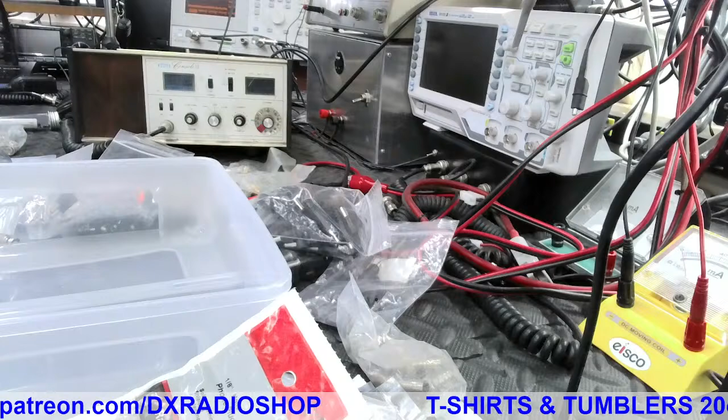So we had to help him over the phone with that. Then he got upset. He says, well, shouldn't you have told me that to begin with? I said, well, shouldn't you have already known how to start a truck and know how to drive it before you start the truck? He said, what do you mean? I said, well, it's not my job to remind everybody about your SWR. That's your job to know that you don't just put a CB in a vehicle and expect it to work. You guys got to pull your weight too, so I had to explain to him all about SWR.

And after explaining this to him, he says, no, I understand. We even did a demo with this 29, so he understood completely 100%. And he did it himself, hands-on. And he said, okay, nope, I got it. So, okay, cool, get them all squared away.

He's set to go, only to find out two weeks later, he gets in a different truck. Don't you think the same thing happened again? I said, did you check your SWR? No. You know how to do it, right? Yep. Well, then that's why your radio's all fried up again. He says, yeah, but does it matter what vehicle you get into? I said, well, yeah, it matters what vehicle you get into.

I thought you just matched the radio to the antenna. I said, no, you match the antenna to the vehicle, to the ground source, to the plane. You don't take and mount that or match it to your radio. Your antenna doesn't know what radio you have, it's not aware of it being a Cobra, Galaxy, Export, whatever, it doesn't know any of that. So yes, it is important to maintain a good SWR, guys. If you don't, well, then I don't know what to tell you, other than it is what it is if you fry your stuff.

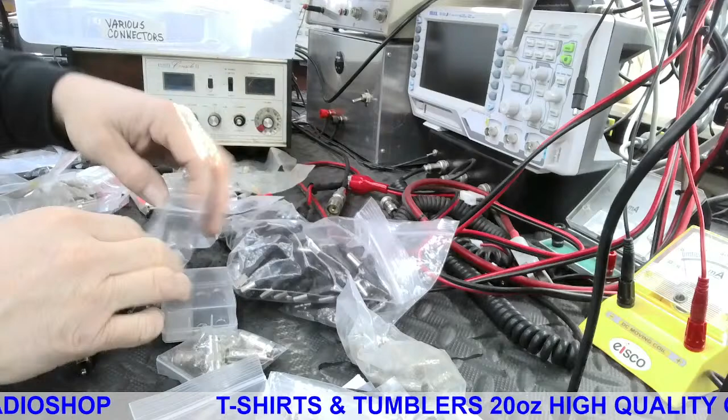Oh, let's see. I got a bunch more of those, don't I? Thought I had another bag full. Yeah, right here. Thought we did.

Transfer these ones over as well. That gives me an extra baggie to work with. Keep them all in one spot.

I gotta build a dipole antenna for a friend.

Oh, there's another bag right here. Jeez.

Yeah, my connector drawer here got a little cluttered, so we decided to organize it this morning before we get involved with all kinds of major repairs today.

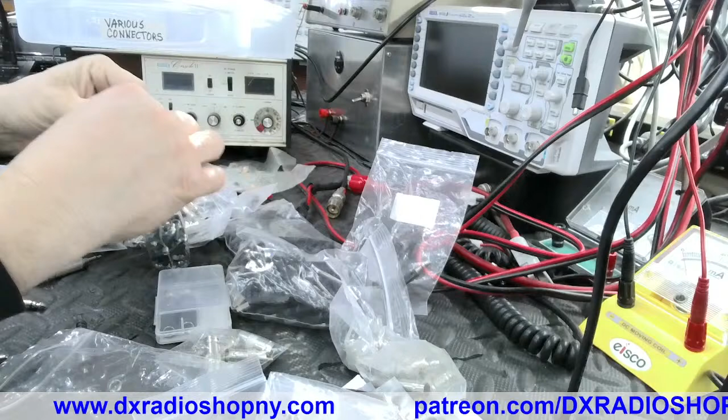But yeah, I got to build a dipole for a guy, and I'm going to show you guys an easy way of doing this, what we call an easy transport connect-disconnect system.

You guys do the same thing, yeah. I'm going to need you here, I suppose, then. Jeez.

So stay tuned for the dipole video, as that will be coming up here real soon. Probably going to be doing it at some point in time this afternoon. Or maybe this morning. I don't know. We'll see.

I got to get onto these radios here. I got a lot of radios that need to be done. So, but I got to take and get some smaller projects out of the way as well.

Okay, I'm going to use the last one. Got one left here.

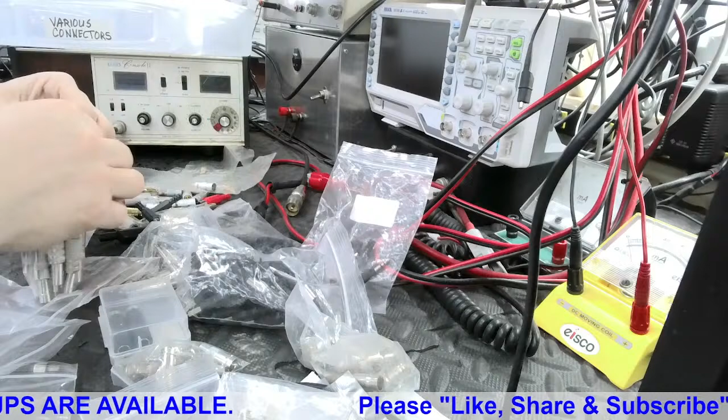Yeah, it makes no sense with a J-pole because it actually showed up as a dead short, and you would think, well, if I transmit, I'm going to fry my radio. So yeah, give me a second here to move things out of the way. Just give me a moment here, and I'll draw this out for you. It's easier that way for me than how I explain it, other than to show you or just tell you my words. So give me a second here.

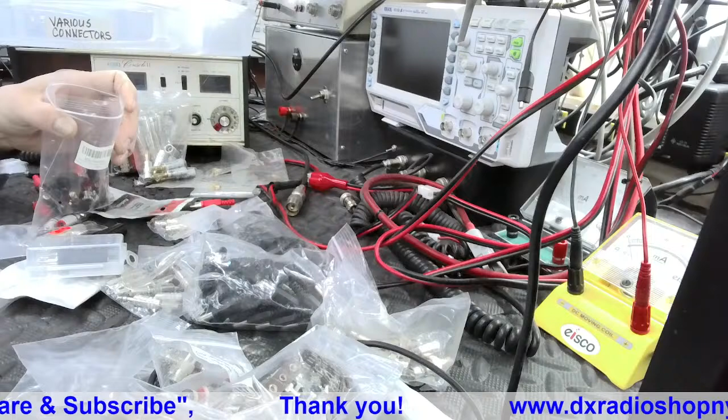Very strange indeed. Let's see, I'll leave you guys here with this. That's a brand new one.

I guess. Put stuff in order. So much easier to have them all bagged up than it is to just loose.

Then I can take an inventory as to what I actually have when I want to build something. So I'm going to be using some of these connectors when I do the dipole today. I haven't decided which yet. I'm thinking the banana connectors, but I gotta see which way I want to go with that.

Thought I had a bigger baggie here.

Okay, so with the J-pole, it's very different. All right, so here's your J-pole.

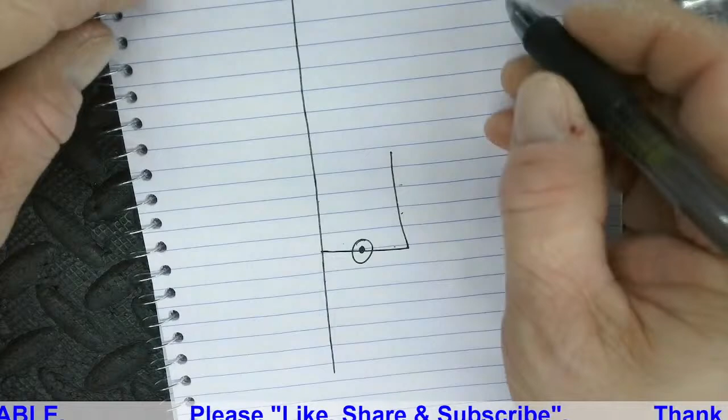Now, if you did a continuity check from point A to point B, you're going to find out that every piece of this J-pole touches. It's all continuity. So you would think, well, that's a dead short, which, yes. However, the capacitance tuning here is what changes all the magic. So what happens is when you do this, we're going to go this way, and we're going to leave a space.

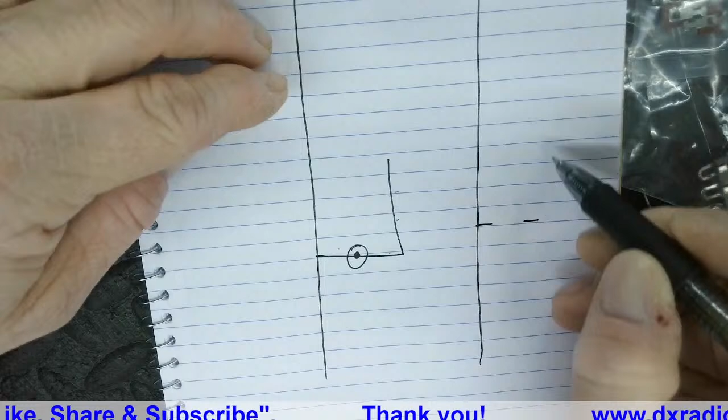And what that space is for is a non-conductive piece of plexiglass that bolts down. Now I did it this way because typically what you'd do is actually take and mount that plastic right here to the half-inch copper, and then your tubing as well.

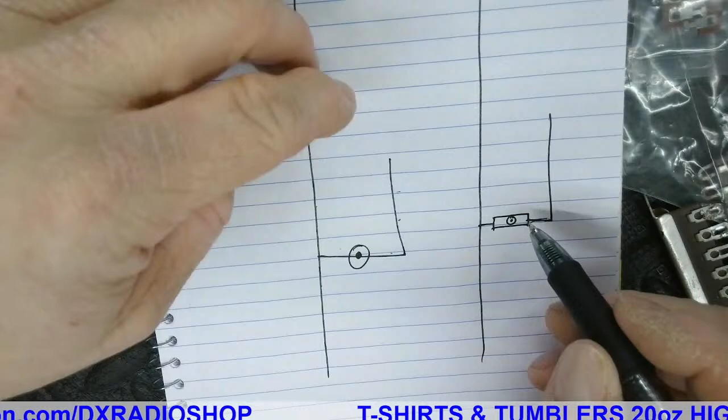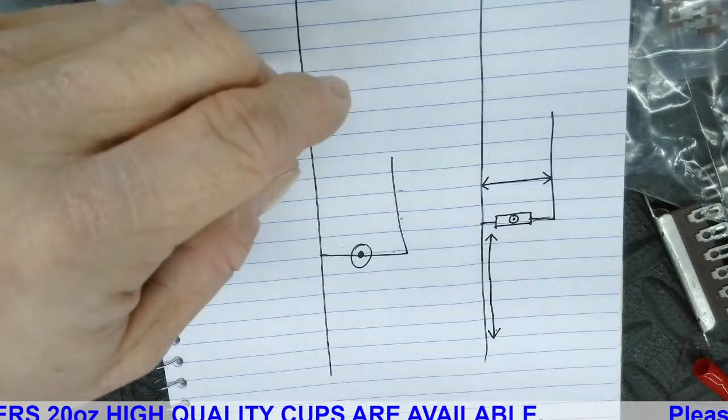So what you're looking for is the tuning here. Now this becomes very important because this has to be spaced just so right, and then this here has to be a height of just so much, and that gives you your tuning of the bandwidth along with the lengths of your tubing. So let's say, for example, let's go with 60 inches tall.

Well, let's see, 19 minus the difference. Yeah, it'd be roughly about like this. It might even be like maybe 20, might be about like 20 3/4. Actually, I think it is.

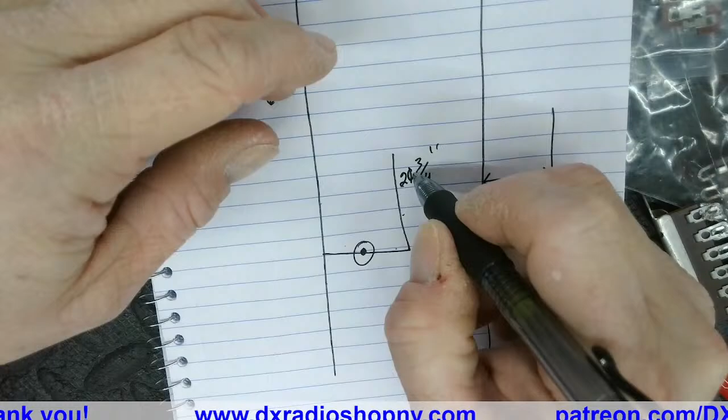So what you need typically to do a VHF UHF antenna, you would only need something that's going to be 19 1/4 inches to get you your VHF band.

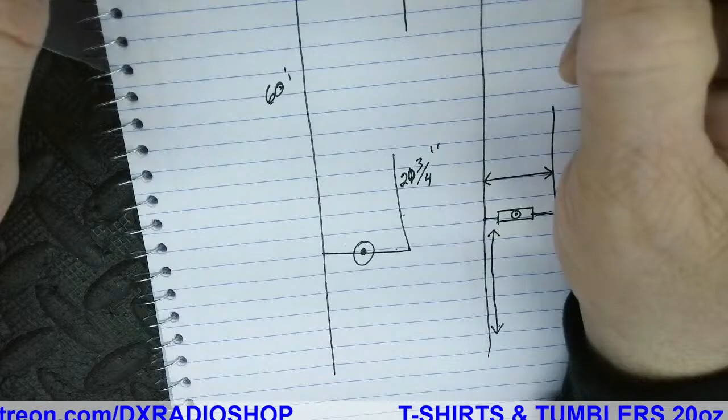Okay, however, this measurement here is more than this because you're going to end up having like a little nub sticking down, like so. That's your half-inch copper. So what you're going to end up having is 19 1/4 inches roughly from here to here.

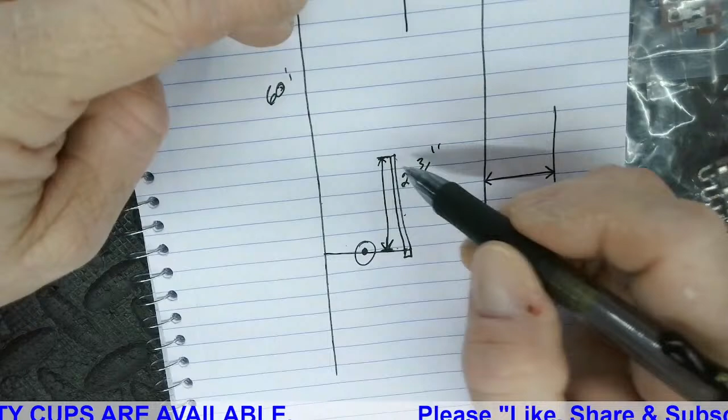Okay, so this little bit is okay because what's going to happen is it's going to actually tee off to this point, as such.

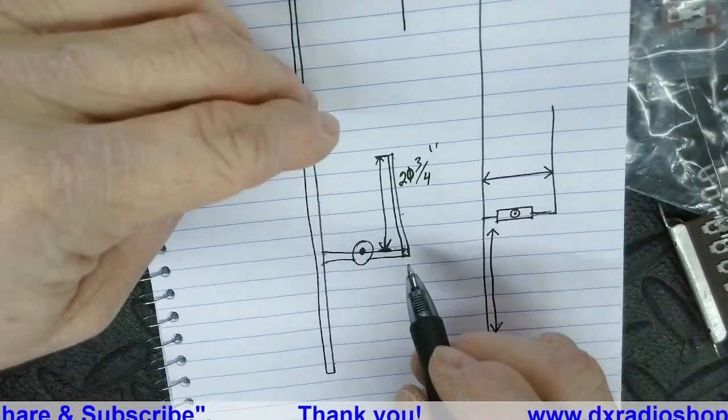Now, we have our measurement there, but we also have to get our measurement here. And they've got formulas, I forget what they were now. What was it, 7? I don't remember off the top of my head, it's 700 something or 468 divided by frequency, or I forget what it was now.

I'd have to look it up. I don't remember off the top of my head. I used to do these all the time, I used to memorize this stuff. I don't do this much anymore. But anyway, so whatever your formula is would come out to be what the measurements would be.

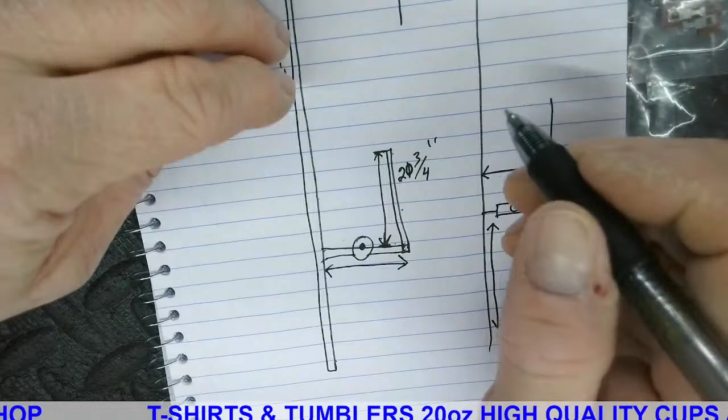And this right here would be the distance from that. So typically, let's say you have a platform. You want to bring this piece here down, we'll say, well, at least 3.5 inches. That's right, or is it 3 inches?

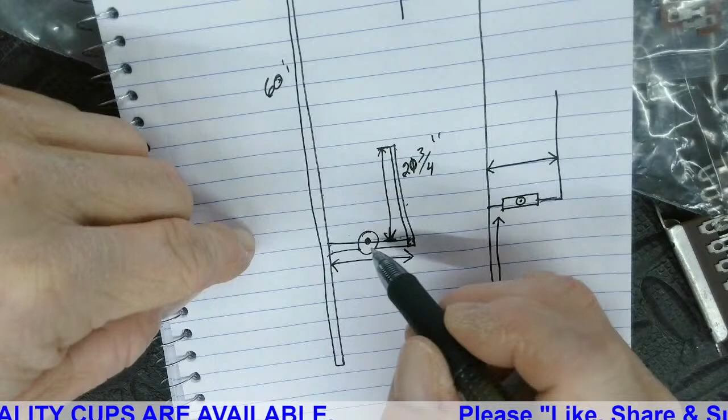That's 3, because you're 3.5, right? Or is that 3.5 up? 3. I'm trying to think which way it went now. It's either 3 inches here, and then this part would be 3.5 inches. Yeah, that's what it was. So 3.5 inches up and down, that's your space in between.

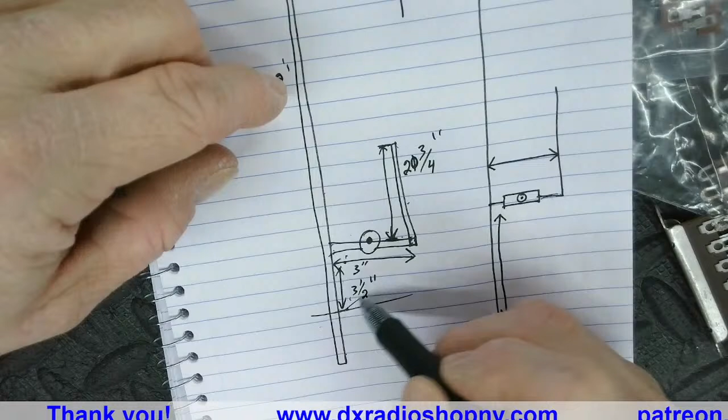Down here means nothing. So then this would be your base platform, and then you've got your 3 inches going across. And so if you get those measurements where they need to be, and you adjust this where it needs to go, so what you're doing is adjusting this up and down on your 60 inch, rather, your 5 foot. You're going to find the right area for that bandwidth, but then you've also got to have the spacing here correct as well.

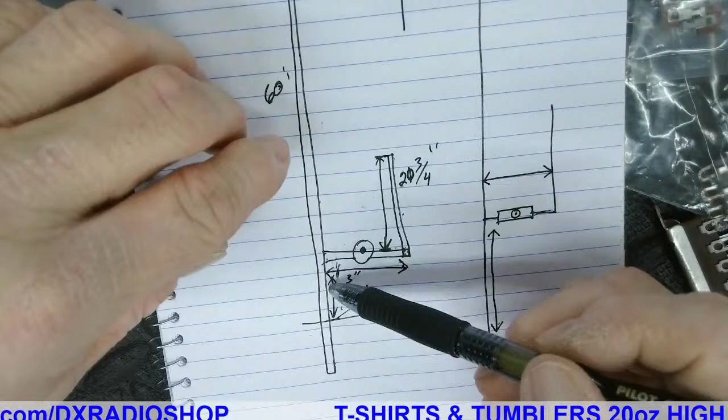So you're looking to get this where it needs to be from the stub up to this point. So, for example, let me get my print up, because I've actually got... I did that with the lamp, and it came out great.

Let me do this, I'm going to print this up right quickly. Just much easier, I can show you guys more other than my scratchy drawing.

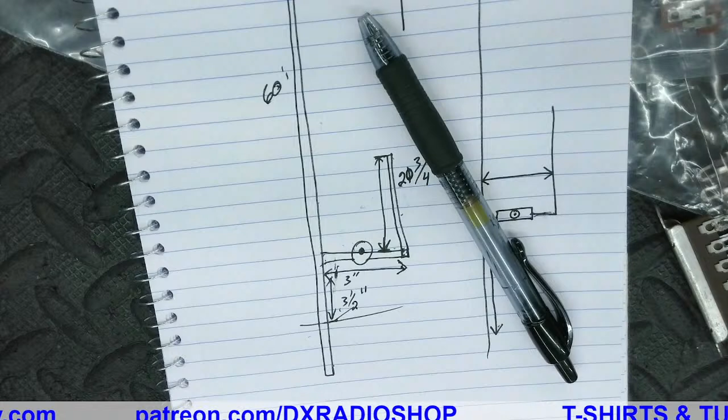I'll give that a second to print up, and then I'll show you. I'll show you what I mean here in a moment. Just wait for it to print up. Get this out of the way.

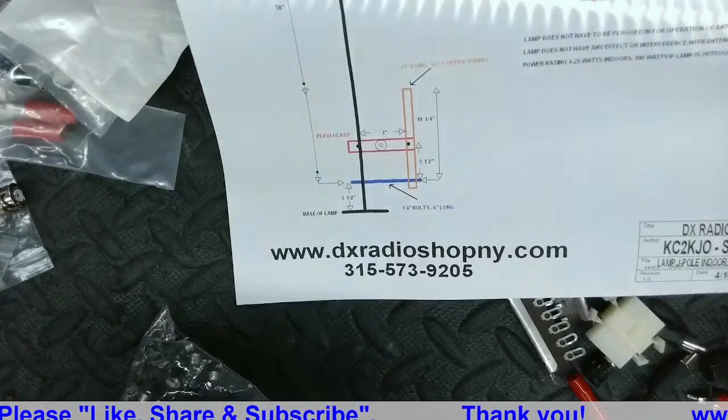All right, pay attention, Brandon. This is your question.

Okay. Trying to sort the parts out here. Making a mess.

Okay, this is something I designed and engineered myself. And it came out to be a great hit, as many of you all already know.

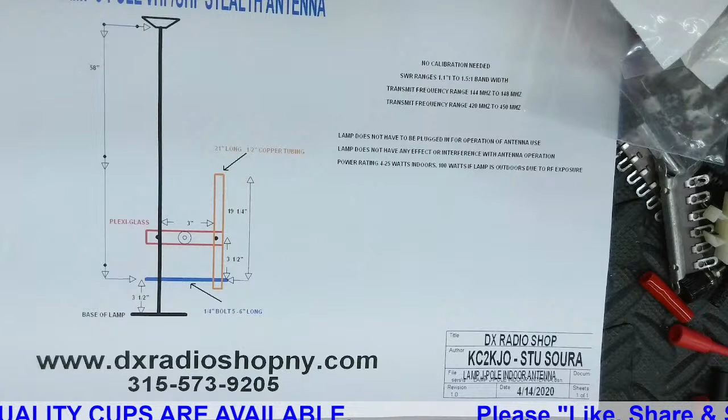Okay, will that work? Yes. As far as the SWR goes, I would be in question of it. It looks like your measurements are off on this. Looks like it's too close to the bottom and not enough spacing. So I would say your SWR on that was probably going to be high.

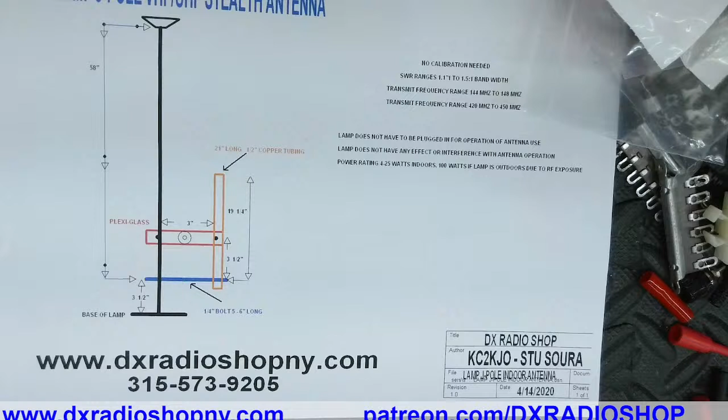If you were to check your SWR, that would probably be high. You're on the right step, it's just you've got to space it and measure a little bit better. But otherwise, you're pretty close with that, so you're doing a good job. You just got to kind of tweak it a little bit here.

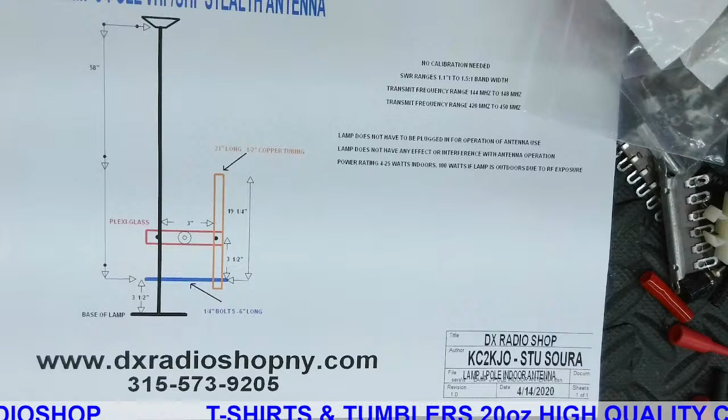Let's go back to the illustration of the print here, so you can see what I'm talking about here. Okay, so this right here is what you'd come up with.

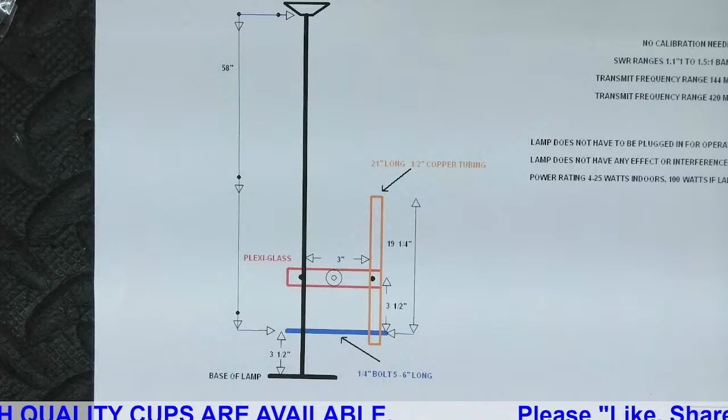So this is a lamp. They're generally about 5 foot tall, okay?

So, 58 inches from the lower part of where the shade is to the base. I'm sorry, to this - 58 inches from the highest point down would be to your low point of the J-pole, okay?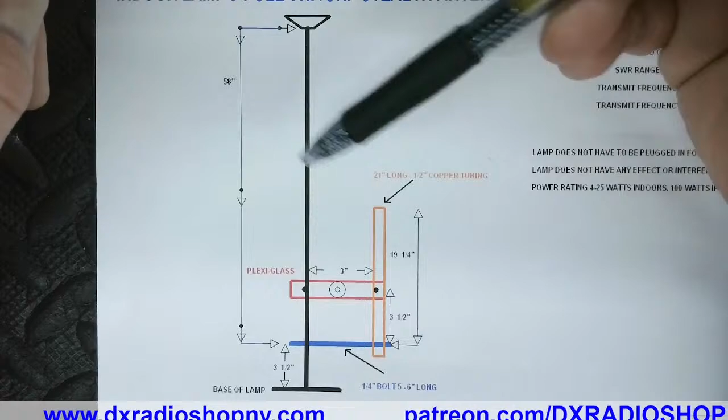So what I came up with, took me a little while, about 4 or 5 prototypes to perfect this with no calibration needed. So these are all preset for everything. And so what this does is you've got your 58 inches here.

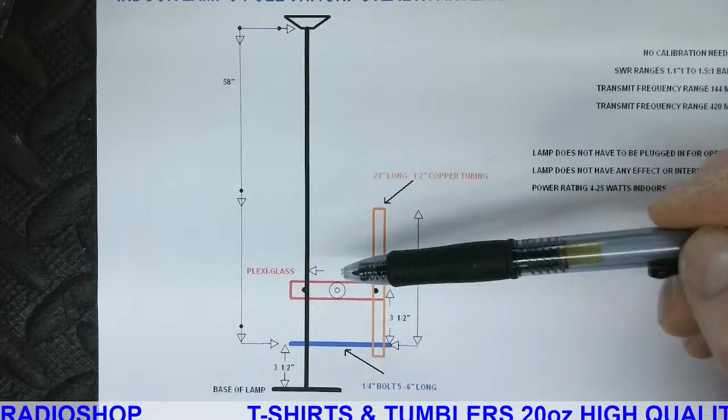You've got 3.5 inches spacing from the platform to where my low point is going to be. And then at that point, we've got our 3.5 inches spacing from the top side of this bolt. It's a 1/4 inch bolt. You can use up to 5/16, but I wouldn't go past that.

So 1/4 inch bolt, and then you go up 3.5 inches to center. So there's your 3.5 to center. This is your plexiglass. The shield goes to one side, and your center connector goes to the other side.

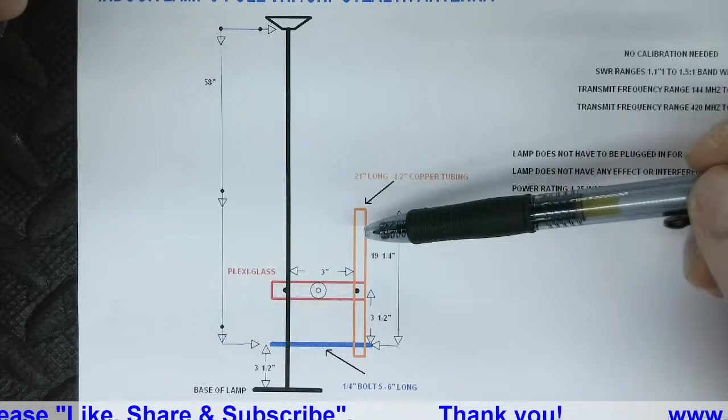Then you've got 3-inch spacing between the outside of this body of the lamp to the inside of this here body of the 1/2 inch copper tubing. And this would give you 19.25 inches from here to here.

So we're going to make that actually a total of 21 inches long. I put 2 3/4, but yeah, 21 inches. I knew it had to be somewhere close to that because you're going to have a little stub hanging off, but that's okay. So this will give you the proper tuning.

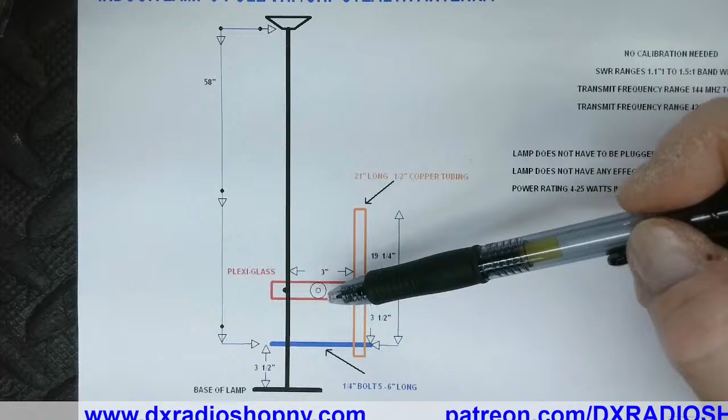So where you raise this part up and down, and the spacing in between, is what gives you your capacitance change of the SWR. So that's where it becomes critical.

But if you still do a continuity check, it's all going to show touching, which is what it is, because you're down here with a solid connection. This is not fully isolated because you've got that connected for your low point.

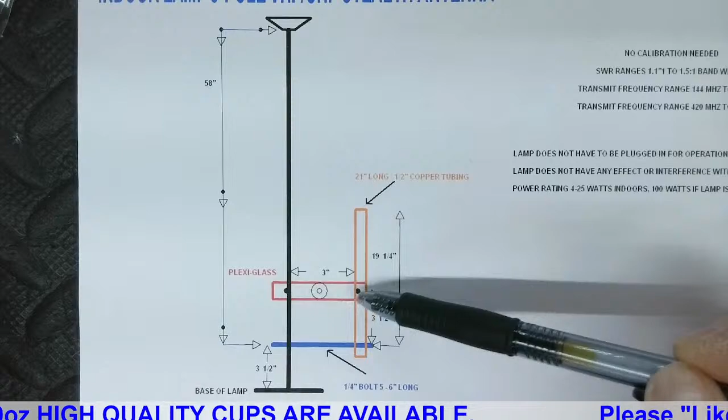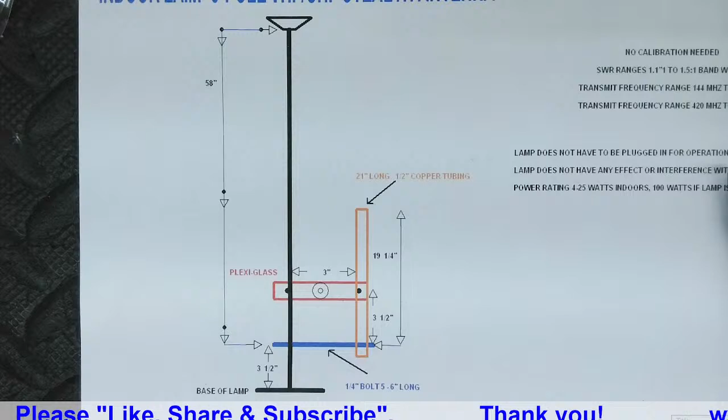So, but yeah, this is what you're looking for right here. This is the measurement. So you want to be 58 inches from point A to point B. At that section, you're going to come across...

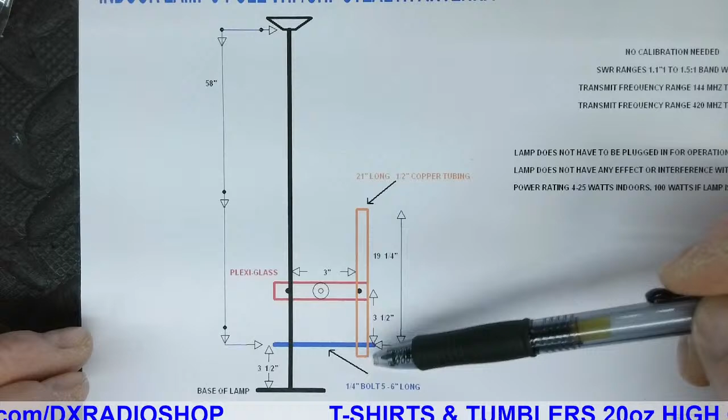I am using a 6-inch long bolt, double nut on both sides, double nut on both sides. It's a quarter inch bolt, 1/4-20 thread. So what you're going to do at that point is when you come down 58 inches from the base point, 3.5 up, 3-inch spacing.

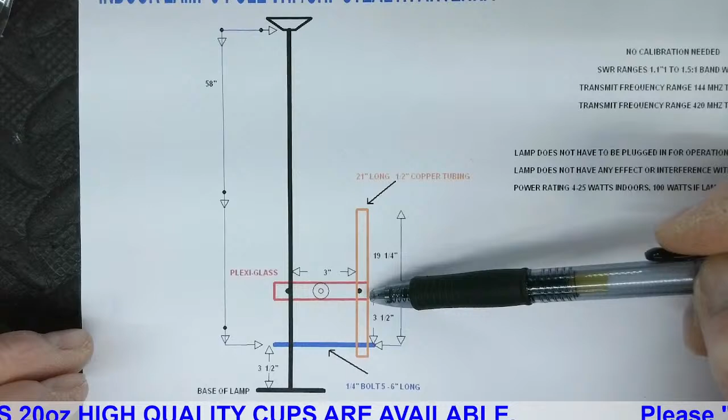3.5 up from this point, the top of the bolt to the center of your - sorry, I said that wrong - from the center of the bolt to the center of the plexiglass. Should be center to center, would be 3.5 inches. And that would give you a pre-calibrated antenna J-pole system.

Now if you want to change this for a CB band, you could do that. You've got to have a longer bolt here, or I mean a longer pipe, which should be about like another foot, I think it is. And then I forget how long this is going to be, but this becomes a little bit longer as well. And then of course your spacing up and down, side to side, and here changes as well.

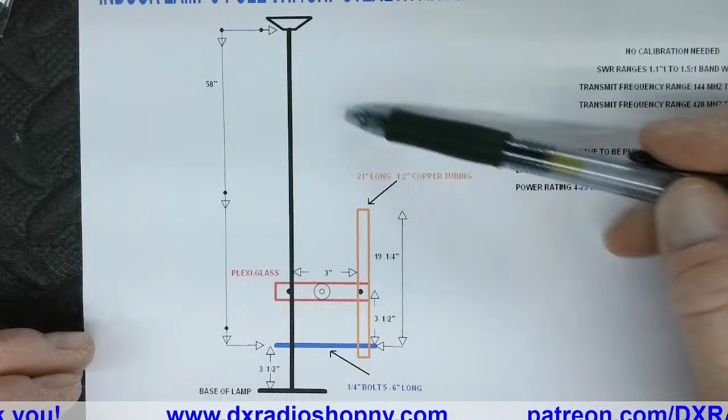So calculations for this is for a VHF UHF. If you want to go for 11 meters, then these are going to be a lot larger. And if you want to do much bigger yet, like a tower, if you want to take a tower and put that to a J-pole and still use the tower for its main purpose with an antenna on top, you could do that. But again, it's going to be different.

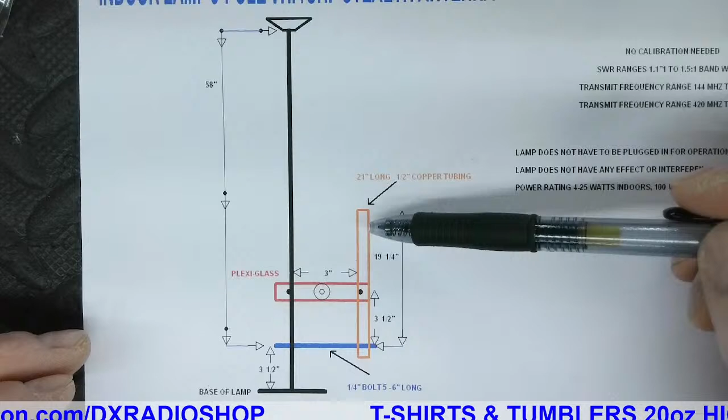We were going to take a friend's tower and turn that into a 20-meter J-pole, but we would have come out like, I think it said 8 or 10 feet this direction, and then come up like another, whatever it's going to be, 7 or 8, 10 feet. So you would have had to anchor that down with a non-conductive strap of some sort to hold this pipe from swaying back and forth.

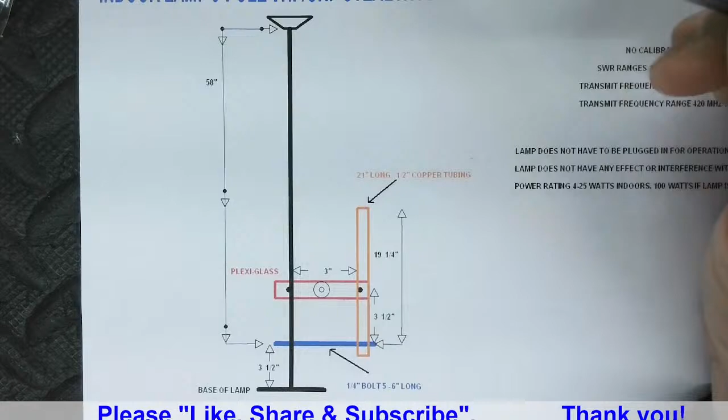So we were going to do that. We never had the chance to get it done, but you could take a tower and convert that into a J-pole, use the tower as an antenna along with whatever antenna you got up on top would be isolated by itself as the antenna and what you wanted to run for that bandwidth.

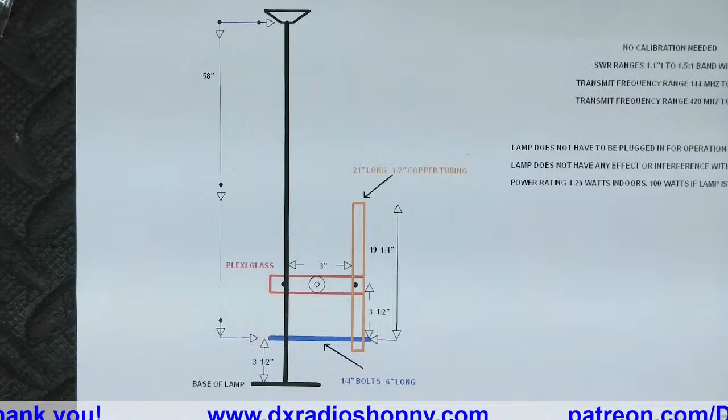Yes, you can do it either way. You could put the conductive side over here and the shield on that side, but typically this would be your shield, and that would be your conductive side. But I've seen people do it either way, and it still comes out the same. Slightly different on the tuning a little bit, but yeah, I use the shield here, and I use the center conductor over on the shorter element.

No, you don't have any RF loss. No.

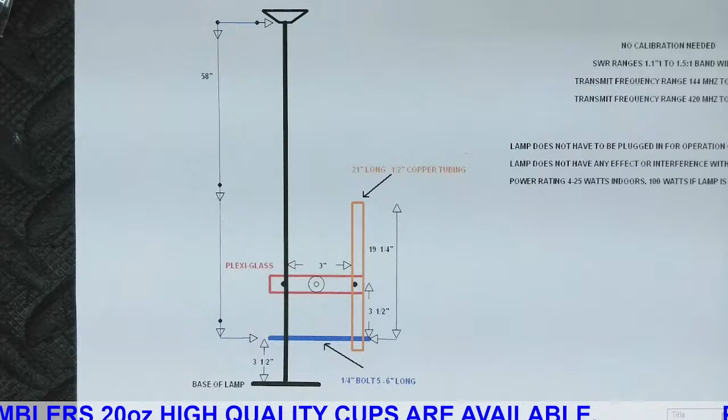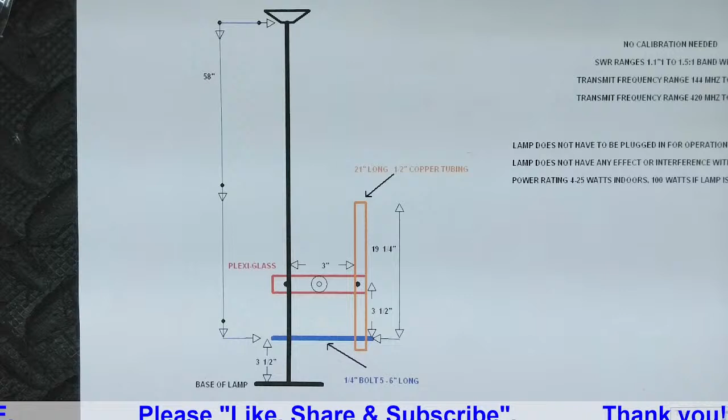And what's nice about this design, it took me a while. I sat down one day and wanted to check it out, playing around with some measurements. And I made 327 of these lamps. My mom, my son, and I made 327 of these things and sold them for $48 a piece. So we had quite the year. That was back 2019 when we built all these things. So it's 6 years ago, come spring, since we did these, and we don't make them anymore because I just let everybody take the measurements and do what they want with it.

Because we don't have room to store these things. So, but it's really easy to do. You don't have to buy a lamp. You can just build it yourself out of copper piping if you wish.

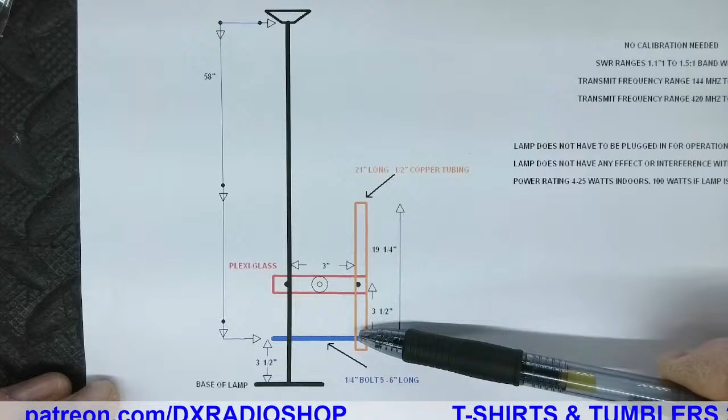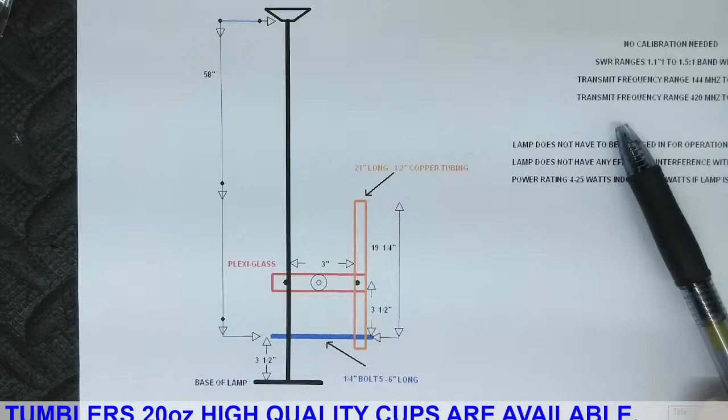I've seen people use copper tubing, and they come down the copper tubing here with an elbow to here, and then they have your spacing in between, which I've seen people just use hardwire from a connector floating. But I use plexiglass because I want something more stable to kind of support the two posts, and at the same time I don't want my connector floating around. So that's what I do. So that's what she bees.

And yeah, I can share this if anybody wants. I can put this on a post for you. Let me turn my Zello up. I think I heard somebody say that too.

Nikolai posted an online J-pole calculator in chat. Oh, okay. Michael posted online. Yeah, because you can read online and do the J-pole calculation, which I don't remember what they are now. It's been so long since I've done these. It's like 6 years already.

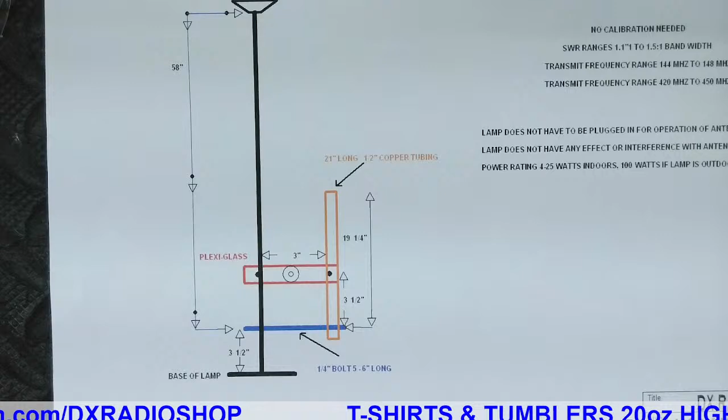So, but it works great. So if you guys are looking to build a simple J-pole antenna, there you have it. I mean, it's not hard. It's just how bad do you want it? You know, really is what it comes down to. If you want it bad enough, you're going to make it. Take the time, put the effort into it. It's all going to come out good. If you don't, well, then I guess you don't have an antenna.

But yeah, this was my baby, my little design that I did, and I'm proud of myself because no one's ever thought of this before, this design anyways.

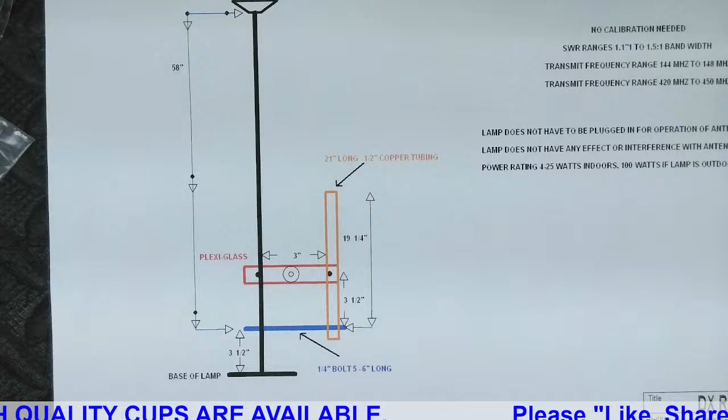And so we went to the first Ham Fest, a local one, and they had a lot of new equipment. Everybody walked away from those people. They came over to my table, and they're like, 'What the heck is this?' And everyone's like, 'Wow, we've got all this brand new equipment that everybody couldn't wait to see.' And they all just came over to the table and then walked away when they see me pulling out these lamps. Everyone kept thinking, 'Why is he bringing a yard sale item to a Hamfest show?' Until they started realizing I'm talking on one with an HT, and I hit that thing.

Let's see, it was from Palmyra to Moravia, where the Frozen Ocean repeater is. So from Palmyra to Moravia is a hell of a jump.

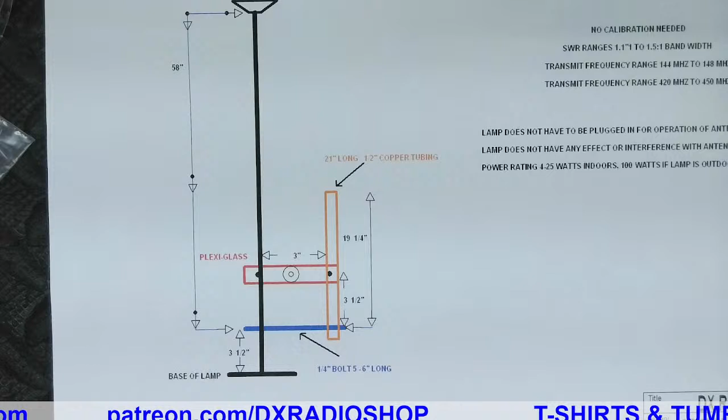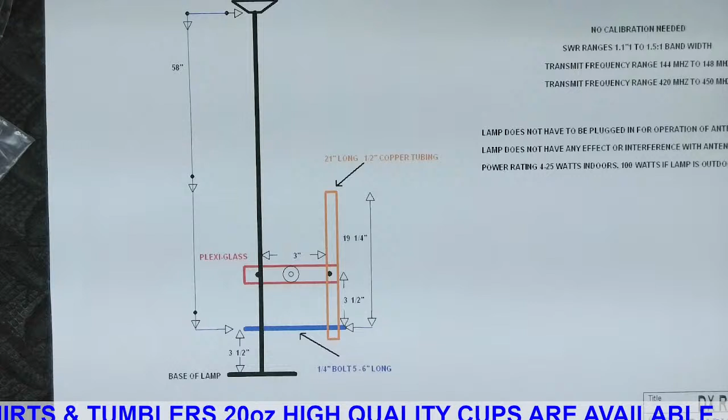And so we opened the repeater at that point in time. A little scratchy, but we got it, and we made a contact on it. They could not believe I used a little 4-watt, which you're probably getting about 3.5 maybe watts out of a Baofeng. And I sat inside with my lamp on top of one of the tables, inside the fire hall, or it was like a VFW, I guess, whatever. But inside the building where everyone's got all the radios going, all this interference, your lamps, your this, your that, and I made a contact on the repeater that was far away.

And I know that Moravia from here is a good 40 minutes from Clyde, and Palmyra is another 18 miles west yet.

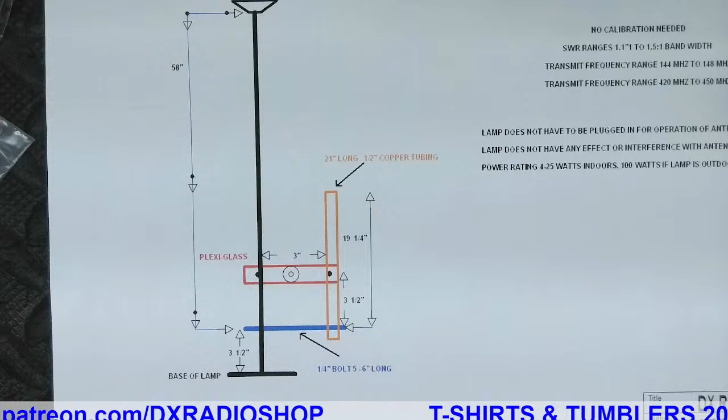That was a huge jump, which was my selling point, because when I did this, everybody couldn't believe it and wanted that antenna. This is exactly what I had done, and I wanted something to help people with HOA issues, to help people get on the air. Maybe your kid wants to get on, but you don't want to put an antenna on the roof just yet, or you want to see how they do. It's a cheap way to make an antenna, enjoy the hobby, and grow with it if you want. So there's many reasons why I did it, but the main one was HOA.

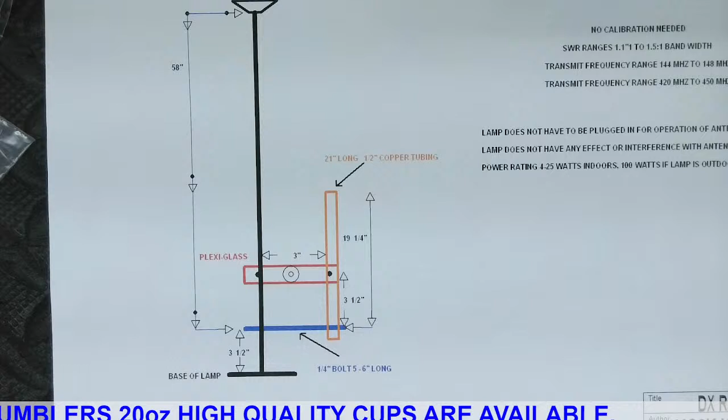I just got sick and tired of hearing these communist people, drama queen HOA types. They'd go to these Hamfest shows saying 'well, I can't do this and I can't do that because I live in HOA.' I understand the vast majority want to keep good, clean yards and this and that, I get it, every neighborhood should have that. But you've got to find the line not to cross, and these Karens, it's ridiculous. I could never live in an HOA, no way.

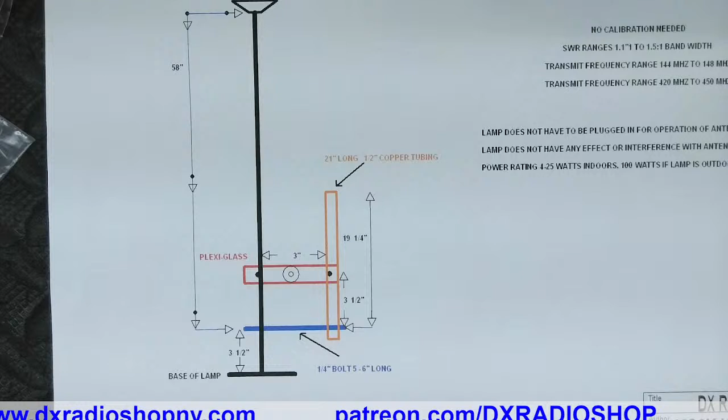Because if anybody came on my property and rang my doorbell to give me hate and discontent because, God forbid, I left for work 5 minutes early, or my lights were on too late, or my utility trailer was 4 inches off from where it should be, or I used my garden hose 10 minutes longer than I should, you would not like me at all. There's no way I'd tolerate that. You spend all this money on a home and you've got to put up with these idiots who come tell you what to do.

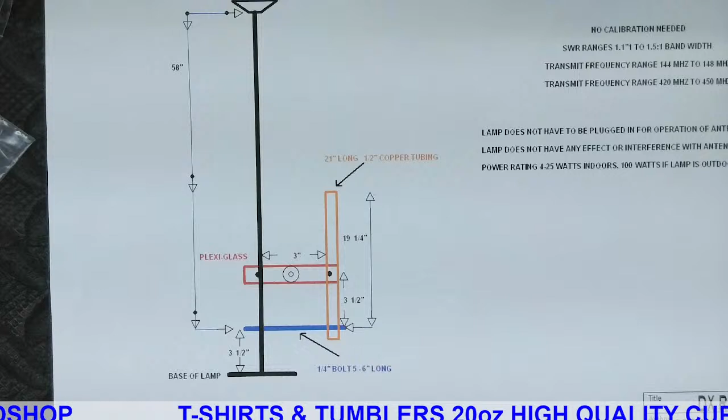I'd be the first one to sit on their front yard and tell them, wait a minute, your light was on past 9 o'clock, it was 9:01. I heard your faucet run at 6 a.m. this morning with your sprinkler, you usually don't do that till 7 a.m. I'd give any excuse to go over there and give it right back to them, because it's ridiculous, it's stupid, it's like a Jerry Springer show. Who wants that kind of drama in your life?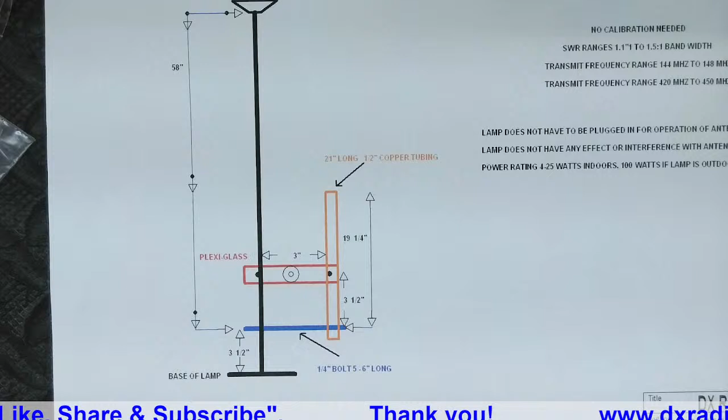If you're going to have laws and zoning that say we've got to have a clean yard, don't leave trash laying around, I get it, I'm cool with that. But there's a fine line you don't cross, and these people cross it every chance they get. This is the main reason I came up with the antenna, because I kept hearing these people at Hamfest shows who only had a Baofeng and couldn't do anything else, saying 'I can't do this.'

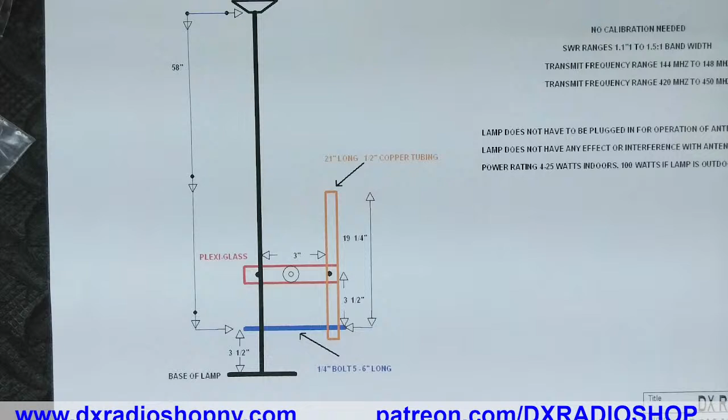Here's what I always told my students when I taught martial arts years ago: 'can't' is a word that does not exist. It's a lazy form of action. Don't ever say you can't—you can if you put your mind to it. You find a way around it. Overcome, improvise, adapt.

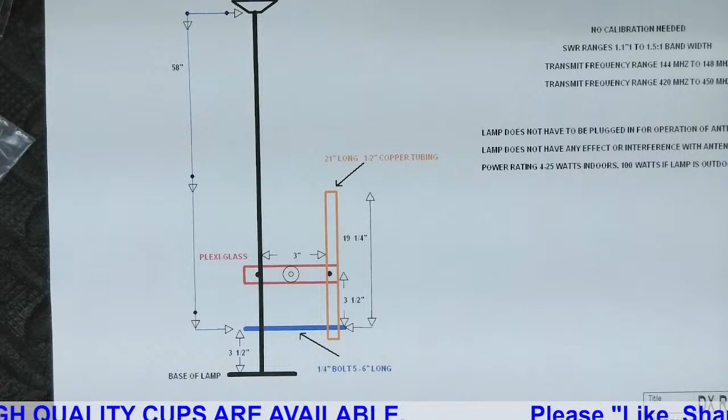So we found a way to do exactly this by using this J-pole idea through a lamp, and that took off like wildfire. We ended up selling 327 of these things that year. At one Hamfest we went to, up in the Rochester area, we took 52 of these just for trial and error to see what would happen—oh my God, they were gone in less than an hour. Everyone was carrying these lamps around. It was a great time. But again, it goes back to trying to help people in the hobby, and that's just the way it's got to be.